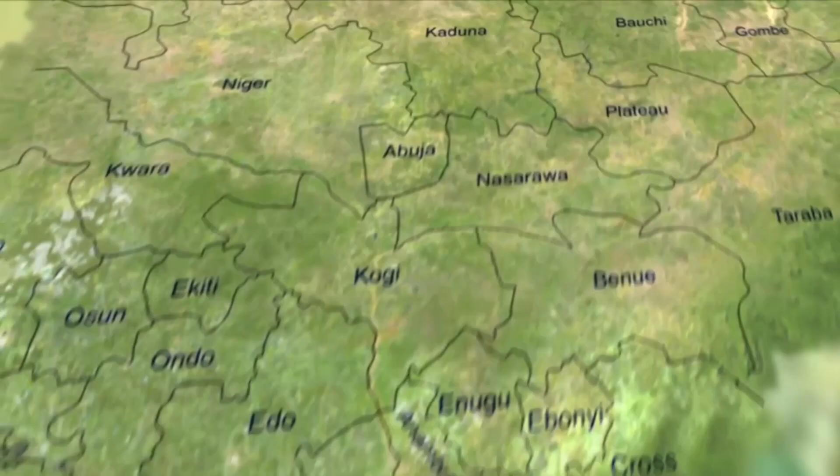The importance of the water resources sector in human life cannot be overemphasized, as it remains dynamic. The strategic position of the sector in Nigeria's socio-economic development has made the Buhari administration place high priority in executing projects in the sector under the Federal Ministry of Water Resources, with the appointment of the Honorable Minister of Water Resources, Engineer Suleiman Hussaini Adamu, in year 2015.

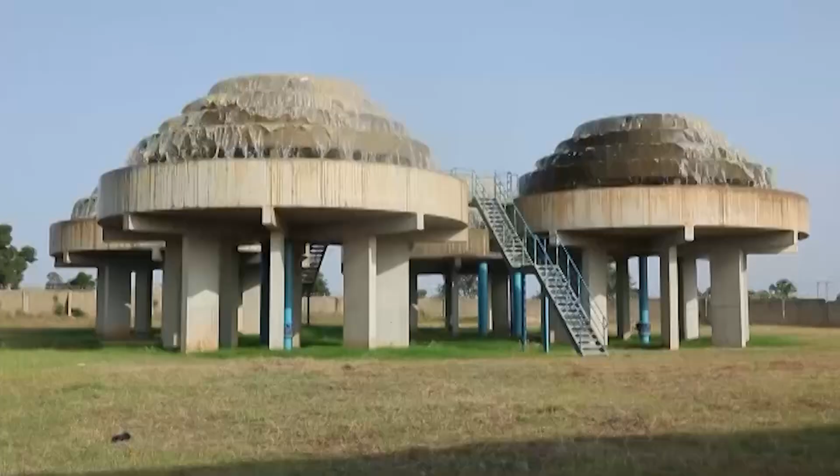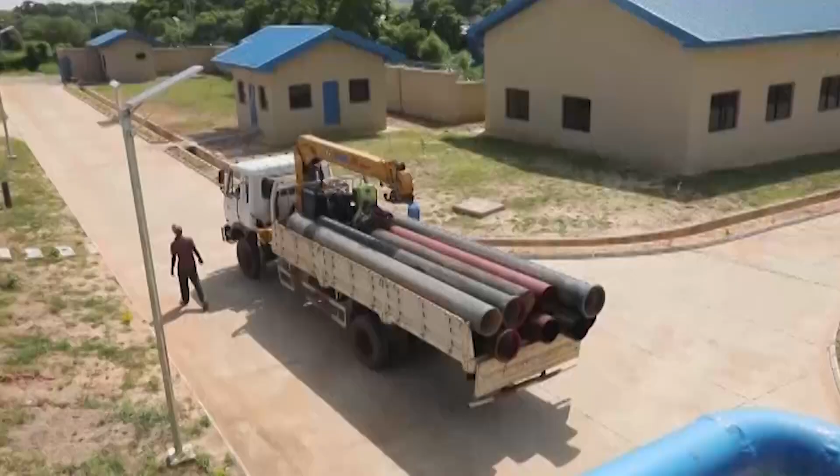As a round peg in a round hole, he went about reinvigorating and revitalizing the sector to enable it to deliver extensively on its mandate and refocus the ministry towards ensuring that the country meets not only its developmental requirements but the United Nations Sustainable Development Goals by the year 2030. A water resources roadmap was instituted by the Honorable Minister to guide the process of revitalizing the ministry. A major component of the reform process is the repositioning, professionalization, and revitalizing of the river basin authorities.

The Upper Benue River Basin Development Authority is one of the 12 river basins established under Decree No. 25 of 1976 and amended by Decree No. 35 of 1987, with a catchment area of approximately 257,606 km². The authority's operational area covers 9 senatorial districts comprising Adamawa Central and Southern Senatorial Districts, Bauchi South Senatorial District, the whole of Gombe and Taraba states in northeastern Nigeria.

The vision of the Upper Benue River Basin Development Authority is the provision of water for multi-purpose uses within its area of jurisdiction and a mission of strategic objectives for exploration, exploitation, conservation of water in a sustainable manner within the context of the National Water Resources Master Plan, brilliantly initiated by the Honorable Minister of Water Resources, Engineer Suleiman Adamu.

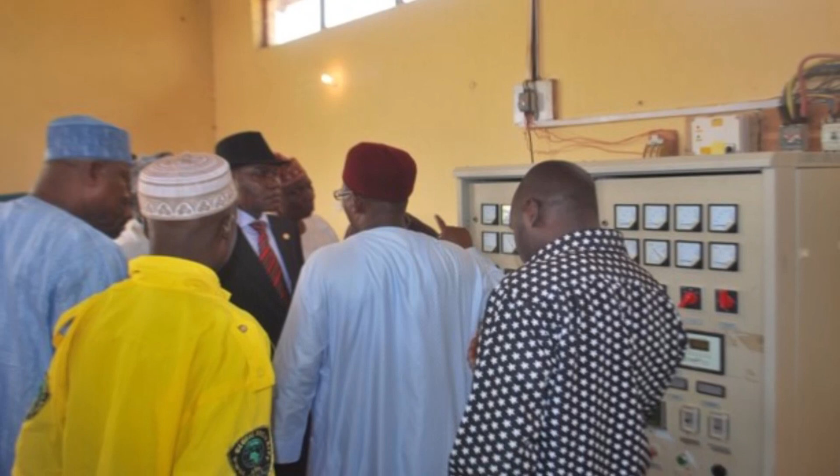The authority has well-trained personnel at the headquarters, area offices, and project sites, with national and international reputation, who have been involved in project conceptualization, studies, and design and implementation of World Bank TRIMING irrigation, UNIDO ICSHP, USAID sponsored studies, and design of hydropower projects, NEWMAP, bathymetric survey of Benue River, and the National Water Resources Master Plan.

The Managing Director of Upper Benue River Basin Development Authority is Engineer A.H. Moazu, Fellow, Nigerian Society of Engineers, Fellow, Nigerian Institution of Civil Engineers. A seasoned engineer, hydrologist, and consummate administrator. He speaks further on the significant milestones of his agency.

Upon coming into office, I gave priority to revitalizing our mandate projects that were existing since the establishment of the organization in January 1976, when the organization was established specifically for harnessing and development of water resources infrastructure, especially irrigated agriculture, for sustenance of the teeming populations of the country.

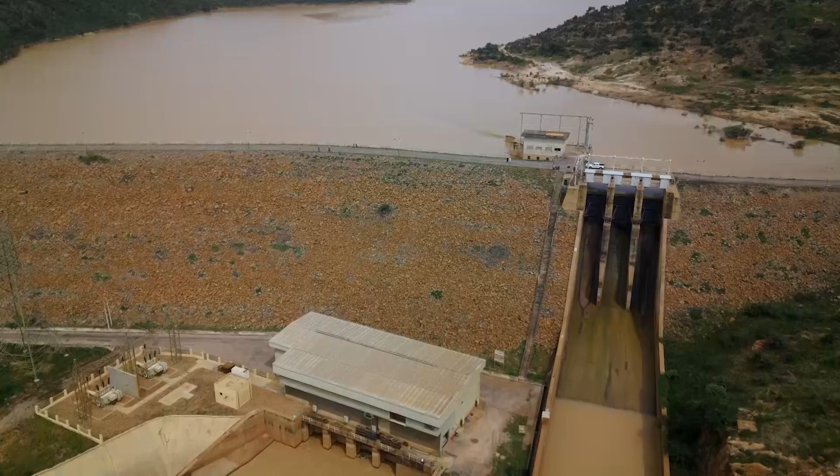Among the numerous accomplishments of the Upper Benue River Basin Development Authority is the completion and maintenance of the Dadinkowa Multipurpose Dam and Irrigation Project located in Gombe State. About the third largest dam in Nigeria, the Dadinkowa Dam has about 2.8 billion cubic meters storage capacity of water. It is designed to irrigate 44,000 hectares gross, to generate 40 megawatts of electricity, approximately 259 GWh per year, to produce 20,000 tons of fish annually, to provide raw water to Gombe regional water supply,

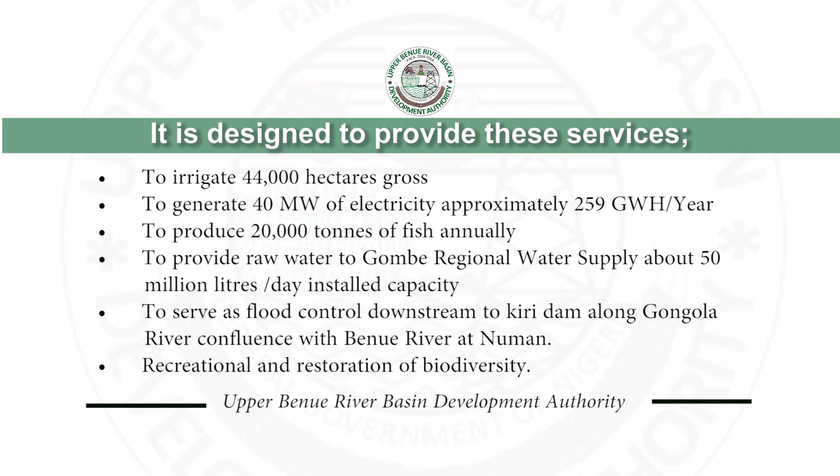about 50 million liters per day installed capacity, to serve as flood control downstream to Kiri Dam along Gongola River confluence with Benue River at Numan, recreational and restoration of biodiversity.

Other milestones in the project include the powerhouse for the 40 megawatt hydroelectric power completed in 2020, generating power into the national grid, ready for commissioning. 2,000 hectares of land for irrigation by gravity under construction by the World Bank TRIMING Project. 40 hectares pilot irrigation scheme established with 2 solar-powered irrigation pumps at Garin Rafi on the minor irrigation upstream of the reservoir. About 10,050 farming families gainfully employed under minor irrigation schemes. Over 470 tons of grains equivalent produced annually.

4,118 hectares are being cultivated under minor irrigation scheme at Dadinkowa Dam drawdown area, with about 28,826 tons of grains equivalent produced annually. Through partnership with RIFAN, CBN and Anchor Borrowers scheme, 200 hectares being cultivated under rain-fed.

This Dadinkowa Dam was conceived, constructed and commissioned by the 15th of June 1988 by the then President General Ibrahim Badamasi Babangida. The dam has a multi-purpose use of irrigation, water supply to Gombe and environs, hydropower generation.

The features of this dam: it is one of the largest dams in terms of volume, third largest now in terms of volume. The gross volume of this dam is 2.8 billion cubic meters of water at a normal level of 247 meters above sea level. And then the live storage, that is the usable amount of water you can use on this reservoir, is 1.77 billion cubic meters of water, which is the one that electricity, irrigation and water supply can tap from.

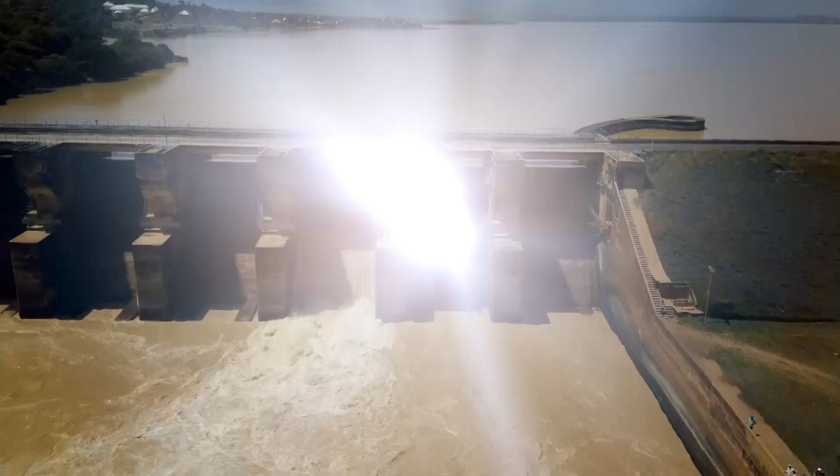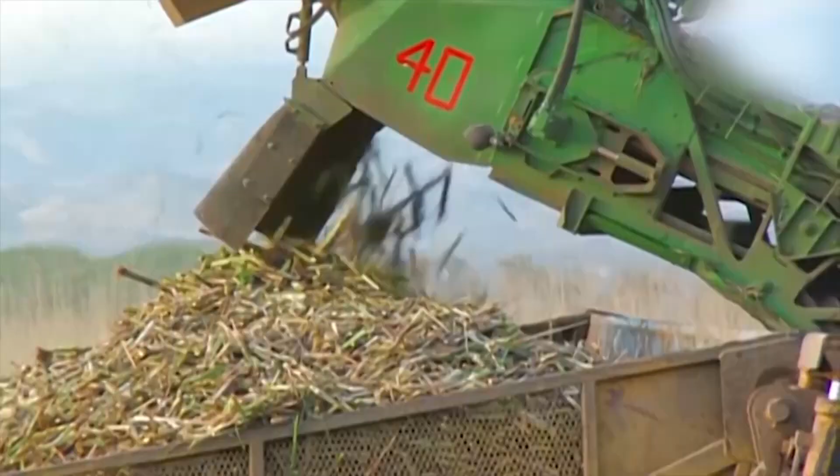Another milestone achievement is the Kiri Dam and irrigation, Adamawa State. Dam constructed in 1982 for irrigation of 12,000 hectares, Savannah Sugar Company, now Dangote Sugar Company. Achievements: dam completed in 1982, 615 million metric ton storage capacity. Main canal, 13.5 kilometers length constructed.

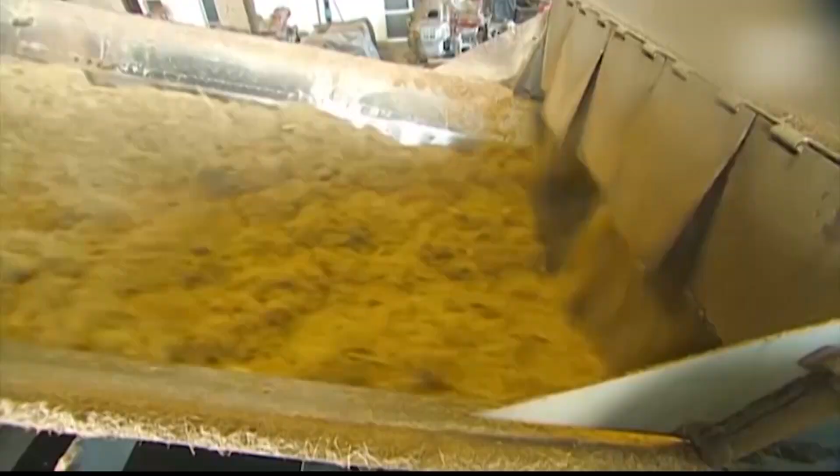6.0 kilometers length canal lined. 7.5 kilometers length unlined canal maintained annually. 16,000 hectares Savannah sugar plantation provided with irrigation water. About 150,000 tons of sugarcane produced annually. Over 120,000 jobs created. Fishing development enhanced. About 12,000 tons of fish harvested by local fishermen annually. Adamawa State in partnership with American firm to produce 25 megawatt electricity at planning stage.

Kiri Dam has a capacity of about 615 million cubic meters of water. We have water all year round for irrigation purpose, and the design inflow of the dam is designed to take in water worth 4,250 cubic meters per second and a design outflow of 4,000 cubic meters per second. Now we try to regulate the water within the normal top water level at 170.5 meters to the lowest drawdown at 167.5 meters of water at the reservoir.

We need the Kiri Dam, and it's very useful to our plantation. And as a matter of fact, we use on our peak period, that is the peak of dry season, nearly 23 to 24 million cubic meters per month. Of course in the rainy season we just reduce it because we have the rain, but it is very important.

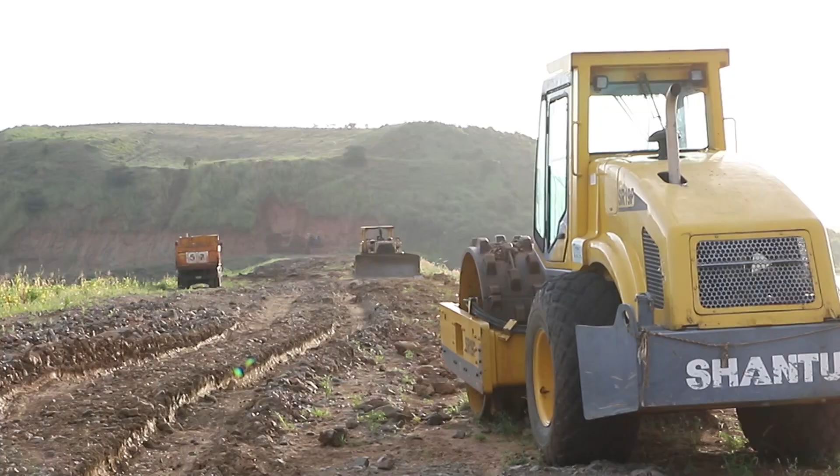The Cham Dam Project, Gombe State. Among the numerous achievements of the Upper Benue River Basin Development Authority is construction of the Cham Dam and irrigation project in Balanga local government area of Gombe State. The work involves reconstruction of the dam embankment and irrigation scheme development. It also includes the construction of the spillway and access road. The spillway is completed while work on the dam is 90% completed. Reservoir already impounded.

Achievements: it serves as water detention for flood control. Development of irrigation scheme for the surrounding communities in progress. We have about 5.6 million cubic meters of water that is lying in the reservoir that is potentially to be used for irrigation downstream of the dam. Presently, the works are still ongoing with about 78.9% completion on the embankment and other components of the dam. The spillway is 100% completed, and if you go to that side, you can see that the spillway is working effectively.

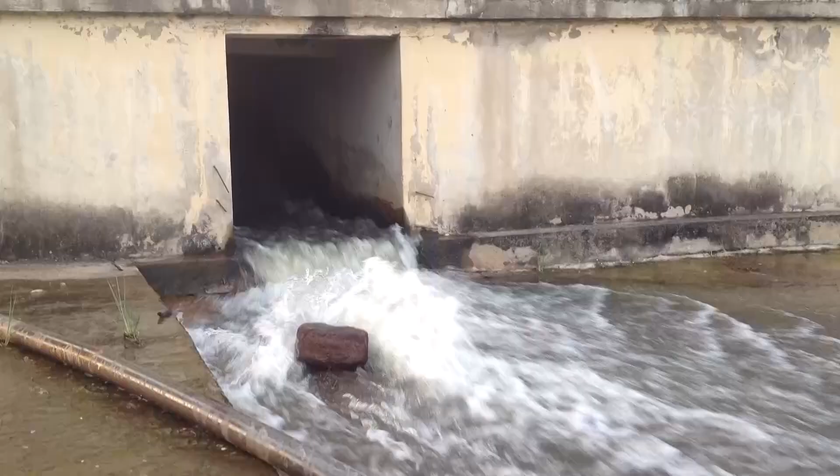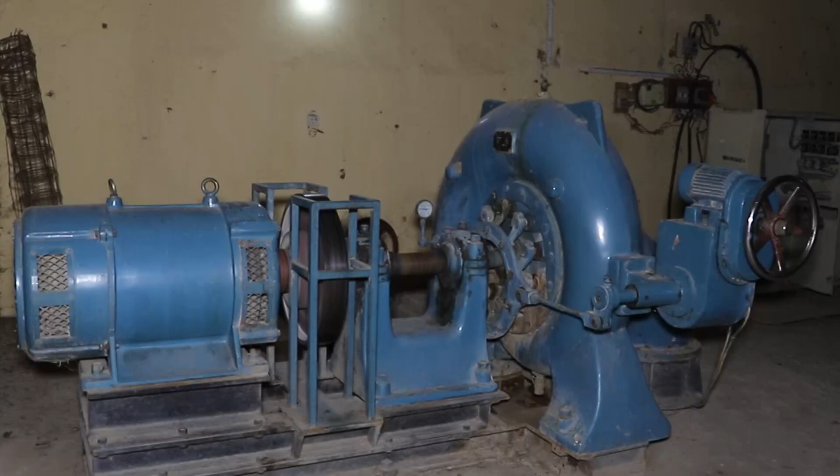Gubi Dam Hydropower and Irrigation Project, Bauchi State. The dam is an earth-filled dam located about 25 kilometers from Bauchi town in Bauchi State. It has a total storage capacity of over 30 million cubic meters. The aim of the project is to encourage the development and provision of small hydropower projects to meet the energy requirements of rural communities who do not have access to power supply from the national grid.

This is expected to stimulate economic activities and improve the standard of living of the communities. In addition, it is used for irrigation, fisheries development as well as augmentation of water supply to Bauchi metropolis. Achievements: dam completed, 37 million cubic meter storage capacity, small hydropower component, 150 kilowatts installed in collaboration with UNIDO, with 7 communities benefiting: Kimni, Giliri, Rumde, and Makira.

45 hectares pilot irrigation scheme developed. 309 tons of grains equivalent produced annually. 151 farming families gainfully employed. About 675 jobs created.

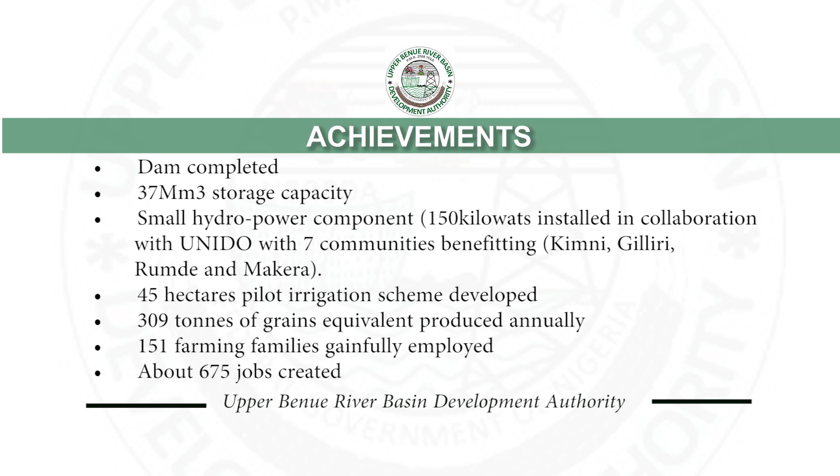Yola Irrigation, Lake Geriyo Project, Adamawa State. This was designed to irrigate 1,200 hectares at Lake Geriyo near Jimeta metropolis. Achievements: 286 hectares fully under irrigation, 233 hectares being cultivated under rainfed. Over 924 tons of grains equivalent produced annually. Over 496 farming families gainfully employed.

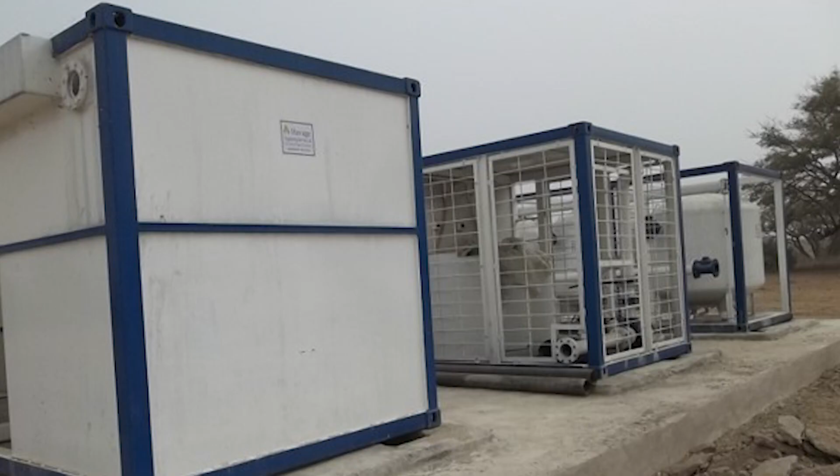About 1,980 jobs created. Kaltungo Earth Dam, Gombe State. The dam was constructed for water supply and flood control. Achievements: 21 million cubic meter storage capacity, dam completed in 2015. Water supply component under construction.

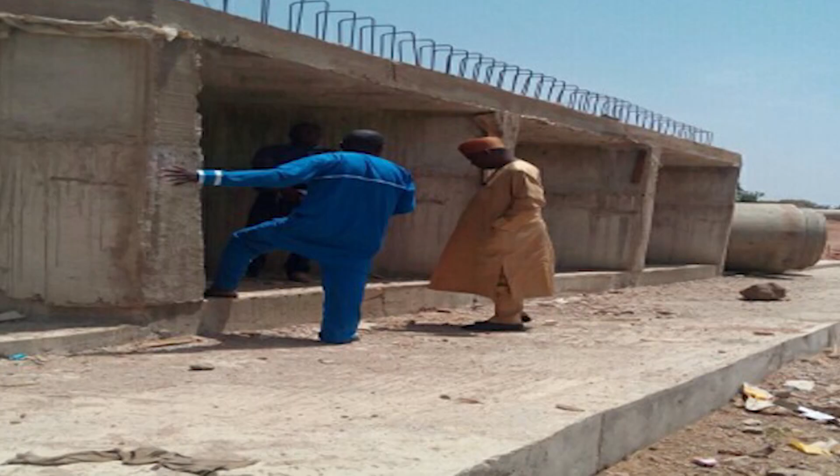Lower Taraba Irrigation, Taraba State. Designed to irrigate 38,000 hectares around Gassol and Mutum Biyu in Taraba State, by construction of a barrage at Tella and 35-kilometer length conveyance canal. Achievements: 9-kilometer length of protection bund constructed. Over 3,000 hectares developed under rain-fed cultivation by the communities.

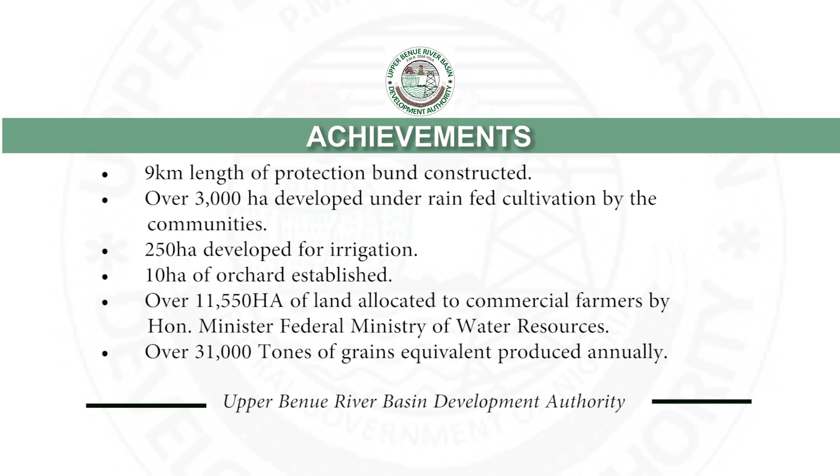250 hectares developed for irrigation. 10 hectares of orchard established. Over 11,550 hectares of land allocated to commercial farmers by the Honorable Federal Minister of Water Resources. Over 31,000 tons of grains equivalent produced annually.

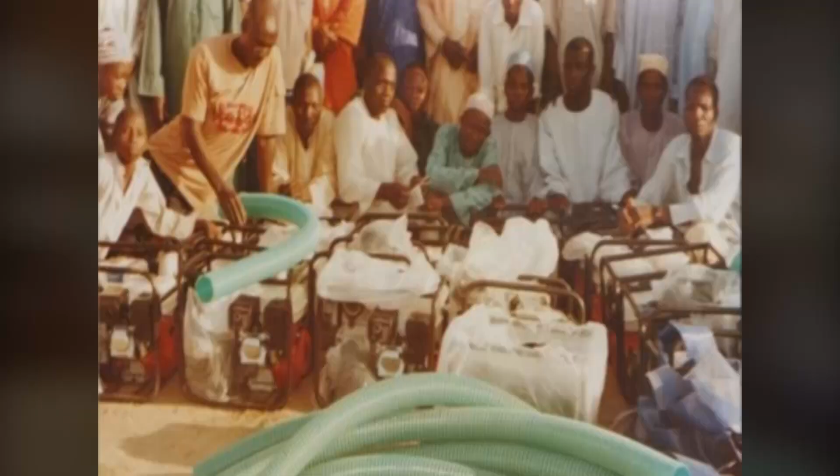Establishment of Songhai Model Farm. The authority established Songhai Model Farm at Tallum, Adamawa, Ruwan Sanyi, Gombe, Waya, Bauchi, and Gassol, Taraba States. The scheme is designed to increase food security, animal husbandry, fisheries, and empowerment of graduate youth within the authority's area of jurisdiction. Achievements: Tallum, Adamawa State, 40 hectares of land developed for solar-powered irrigation.

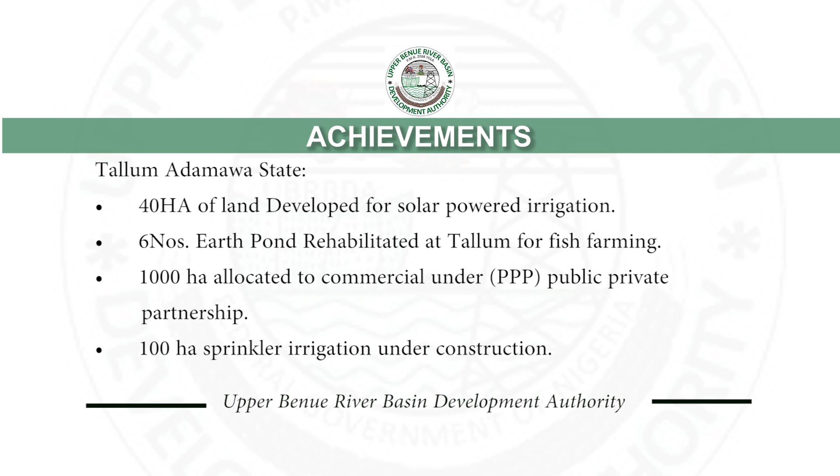6 numbers fish ponds rehabilitated at Tallum for fish farming. 1,000 hectares allocated to commercial farmers under public-private partnership PPP arrangement. 100 hectare sprinkler irrigation under construction. Waya, Bauchi State. 5 hectares orchard developed. 10 numbers fish ponds constructed. Ruwan Sanyi, Gombe State. 6 hectares orchard developed.

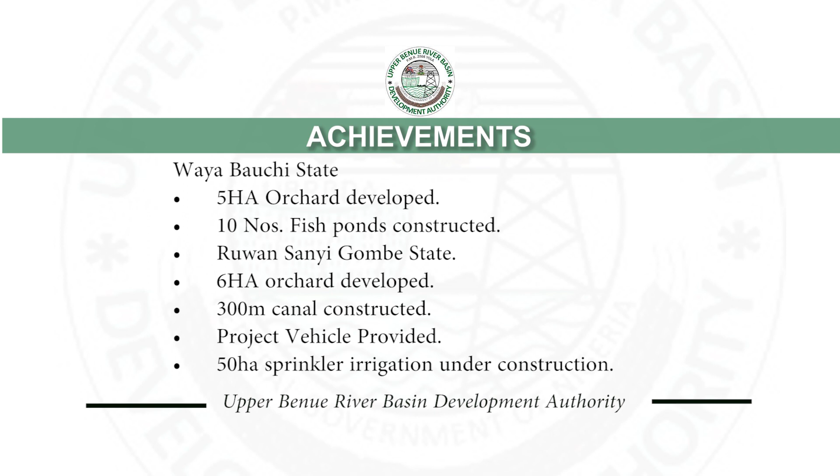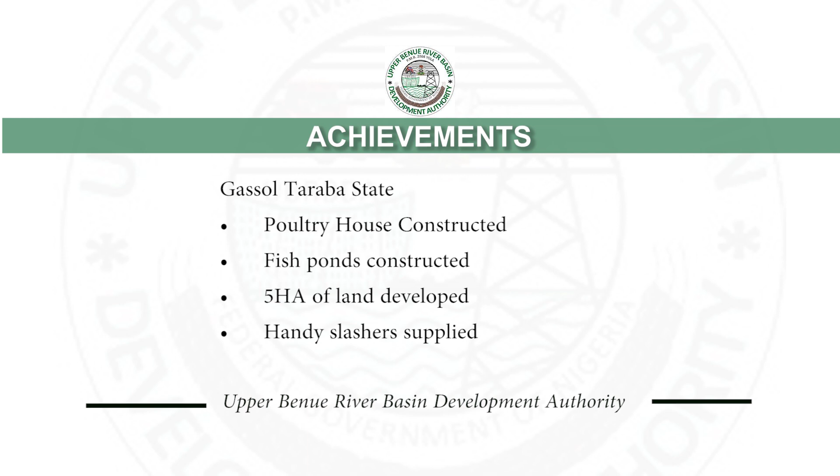300-meter canal constructed. Project vehicle provided. 50 hectare sprinkler irrigation under construction. Gassol, Taraba State. Poultry house constructed. Fish ponds constructed. 5 hectares of land developed. Hand slashers supplied. It is worthy of note that the Upper Benue River Basin Development Authority embarked on construction of

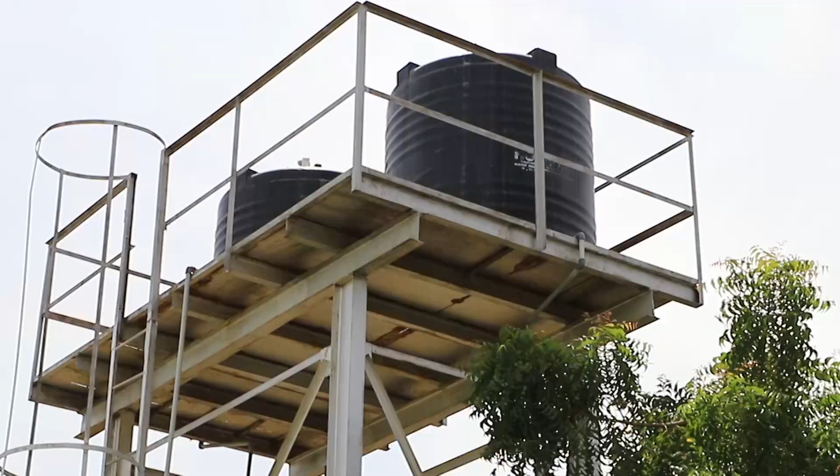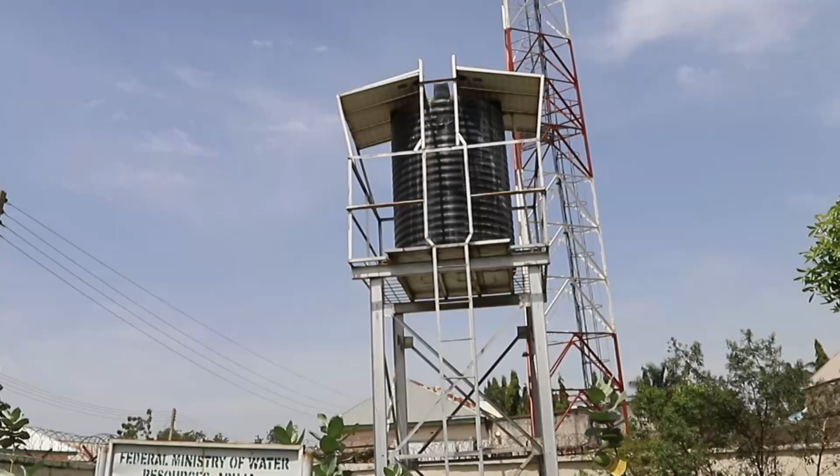water supply schemes within its catchment areas. Significant water supply schemes for semi-urban areas and villages were completed at various locations within the operational area as follows. Adamawa State, from 2016 to 2021, number of solar-powered and motorized boreholes, 184, beneficiaries, 92,000. Hand pump boreholes, 1,141, with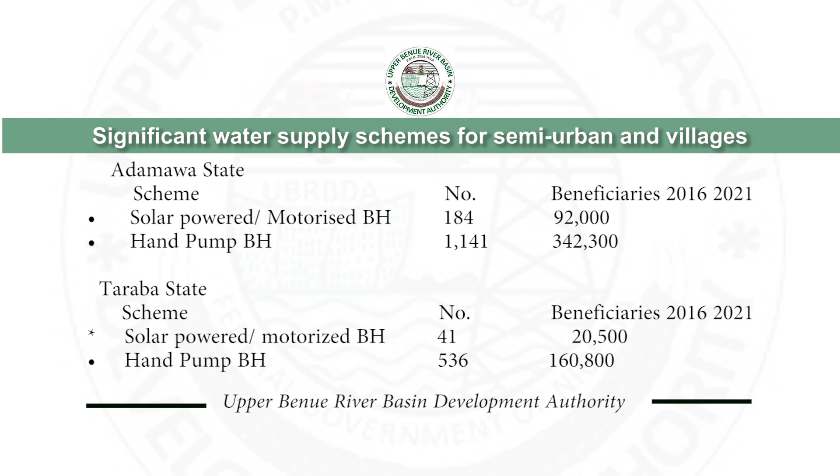342,300 beneficiaries. Taraba State, from 2016 to 2021, solar-powered and motorized boreholes, 41, with 20,500 beneficiaries. Hand pump boreholes, 536, with 160,800 beneficiaries. Gombe State, from 2016 to 2021, semi-urban schemes, 5, with 50,000 beneficiaries. Solar-powered and motorized boreholes, 220, with 110,000 beneficiaries. Hand pump boreholes, 271, with 81,300 beneficiaries.

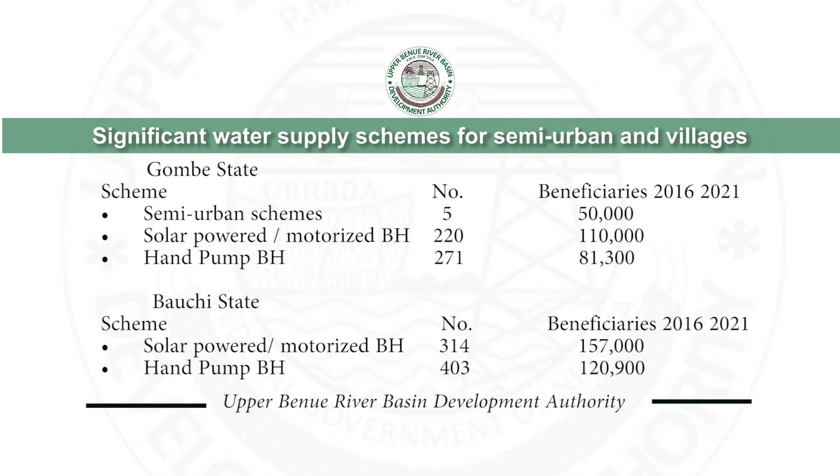Bauchi State, 2016 to 2021, solar-powered and motorized boreholes, 314, with 157,000 beneficiaries. Hand pump boreholes, 403, with 120,900 beneficiaries. In summary, total semi-urban, 5, with 50,000 beneficiaries. Total solar and motorized boreholes, 759, with 379,500 beneficiaries. Total hand pump boreholes,

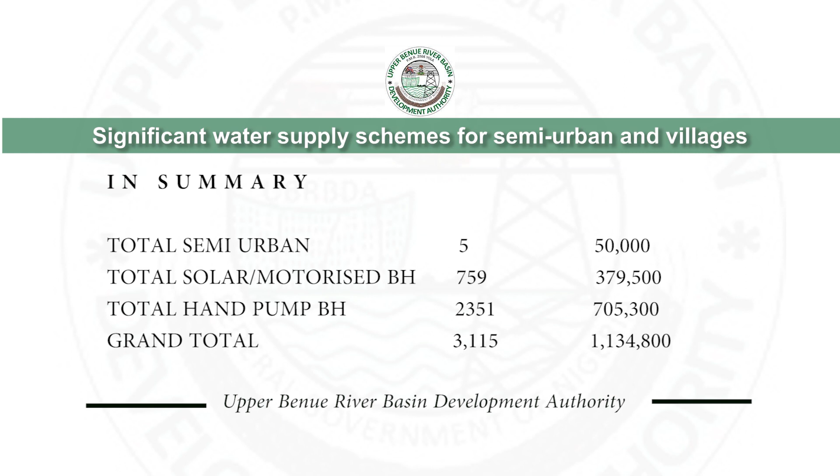2,351, with 705,300 beneficiaries. Grand total, 3,115 projects, with 1,134,800 beneficiaries. Rural and semi-urban water supply schemes.

Since establishment of the organization, we have drilling machines and a team that goes to places where we have projects to provide these services as part of corporate social responsibility. But presently, the federal government is providing money through members of the National Assembly, federal constituency and senatorial projects, for drilling of solar-powered boreholes and hand pump boreholes at various locations.

Apart from our own intervention through our own capital appropriation, underground water development, we also drill boreholes to communities within the catchment areas where we have projects.

Ongoing construction projects by the Upper Benue River Basin Development Authority. The authority has a number of ongoing construction works as follows. Reconstruction of Cham Dam and irrigation. Construction has reached 80% completion. Dugwaba Dam. Construction has reached 35% completion. Mararraban Donga Dam. Construction has reached 30% completion. Belel Dam and water supply, construction has reached 25% completion.

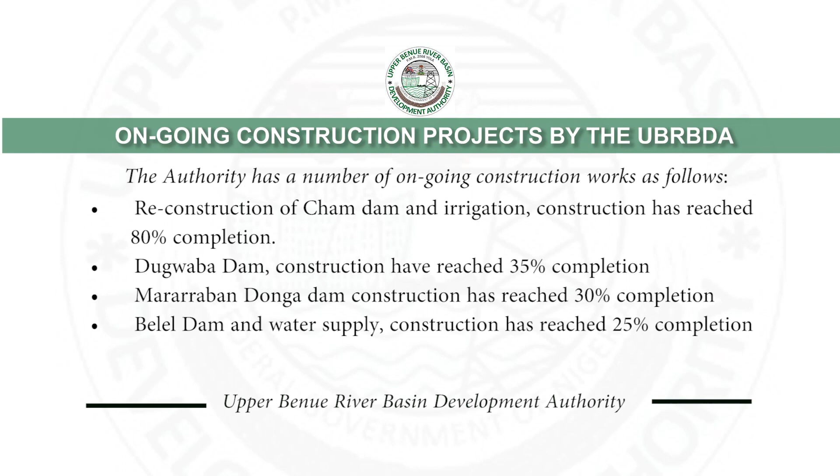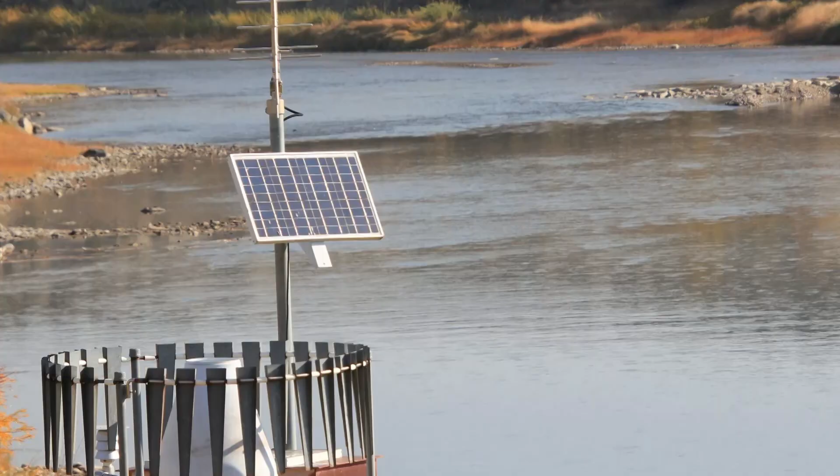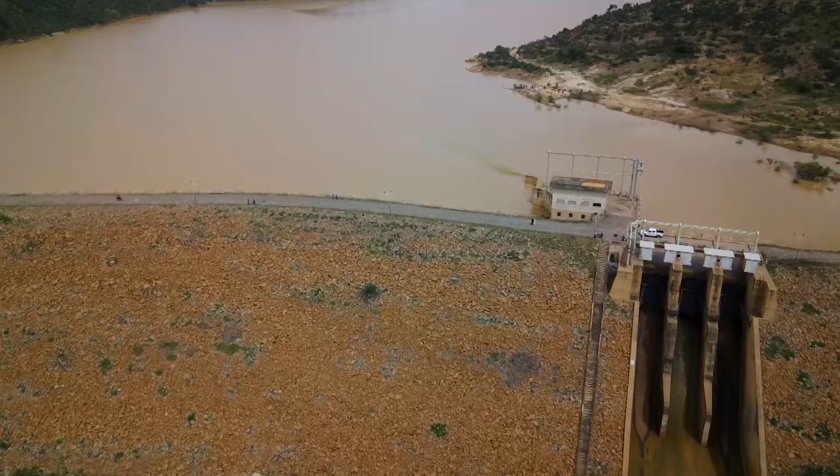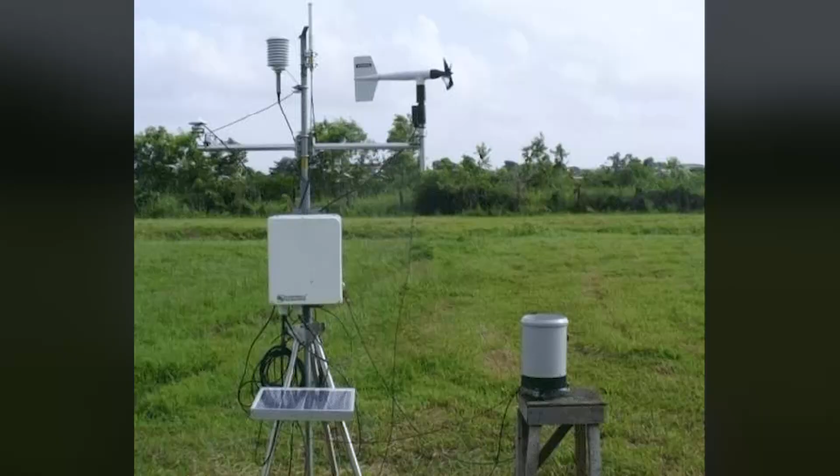Hydrometeorological activities. From inception in 1976, the Upper Benue River Basin Development Authority has about 68 water gauging stations for collection, computation and analysis of hydromet data, which is published in the form of yearbooks and digital data. This has helped in monitoring and maintaining water levels through the stations along the River Benue and its tributaries, to aid discharge and cross-sectional measurement on the River Benue and its tributaries.

The authority has 2 automatic weather stations donated in 2017 by the Adamawa State University, installed at Yola and Kiri Dam to enhance collaboration and research on data for the planning processes. The authority also procured and installed a Davis Vantage automatic weather station at Dadinkowa Dam in 2019.

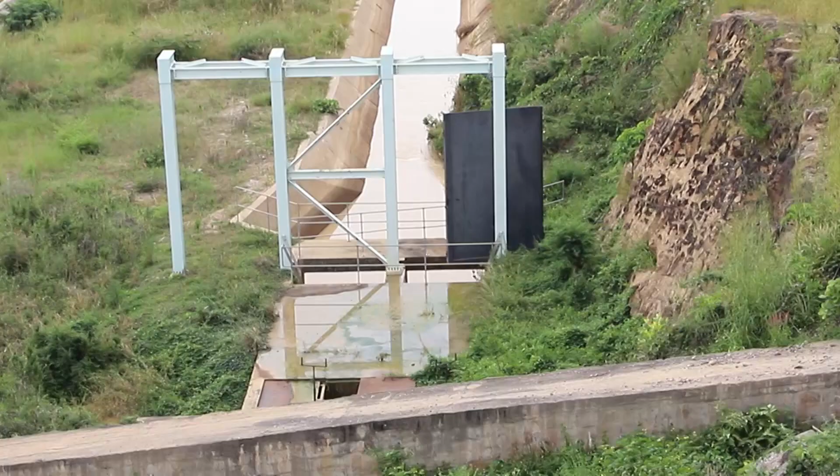Additional 3 numbers were procured and installed at Gembu, Gassol, and Bauchi in 2019. Furthermore, an acoustic Doppler current profiler (ADCP) automated discharge measuring equipment as well as fiber board were procured by the authority for the hydrology units.

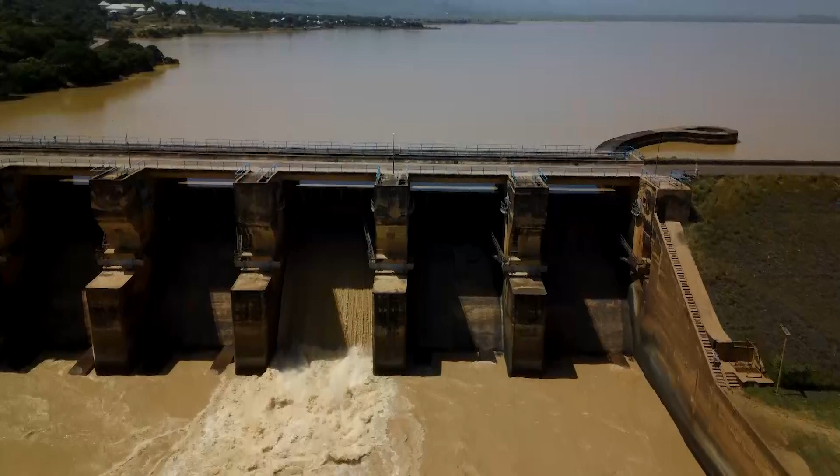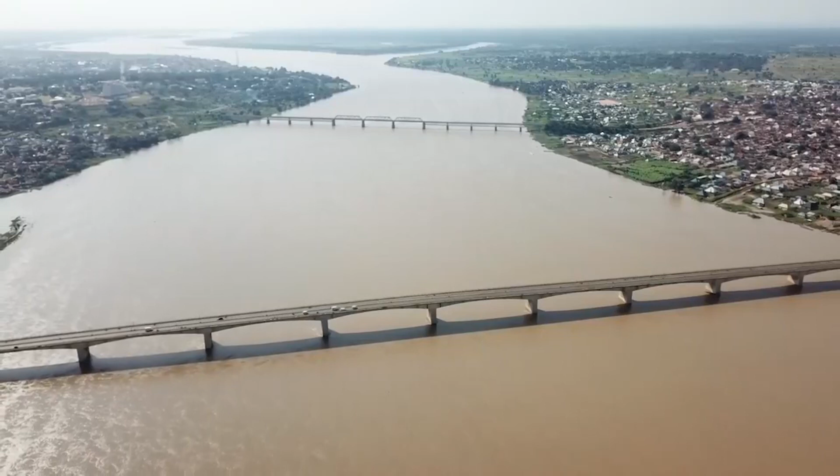The basin has extensive potentials for future development, and these include: apart from Benue River, which is one of the 2 major rivers in the country, the authority's operational area is drained by 8 rivers, namely Mayo Ine, Mayo Belwa, Kilange, Taraba, Donga, and Suntai on the southern bank, and Pai and Gongola on the northern bank.

Feasibility studies carried out revealed that within the operational area of this authority, water resources potential exists to the tune of 55.5 billion cubic meters. To harness these potentials, a dam is required at each of the following locations: Dasin Hausa, Mayo Ine, Kilange, Dindima, Bagel, Gembu, Suntai, and Barrage at Tela.

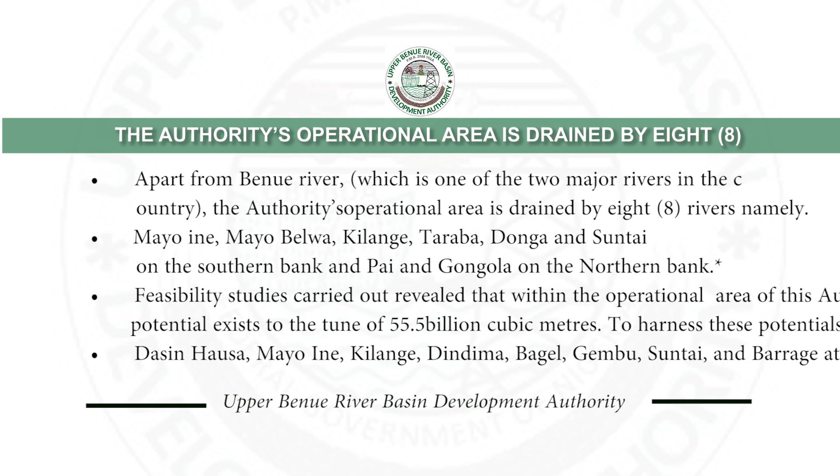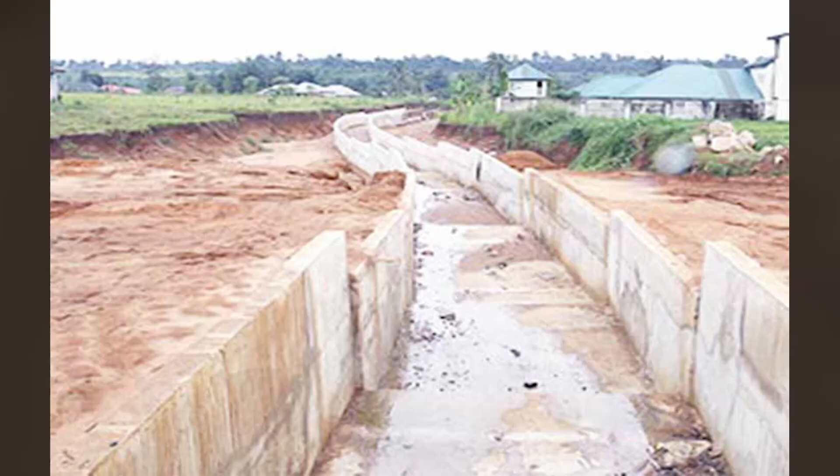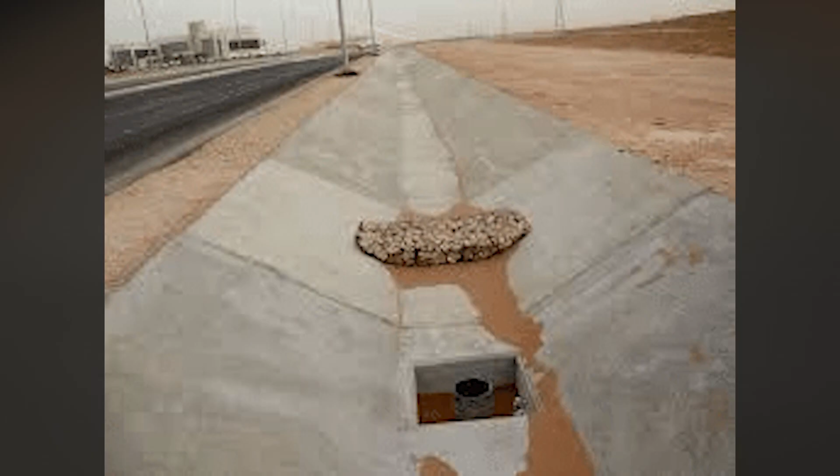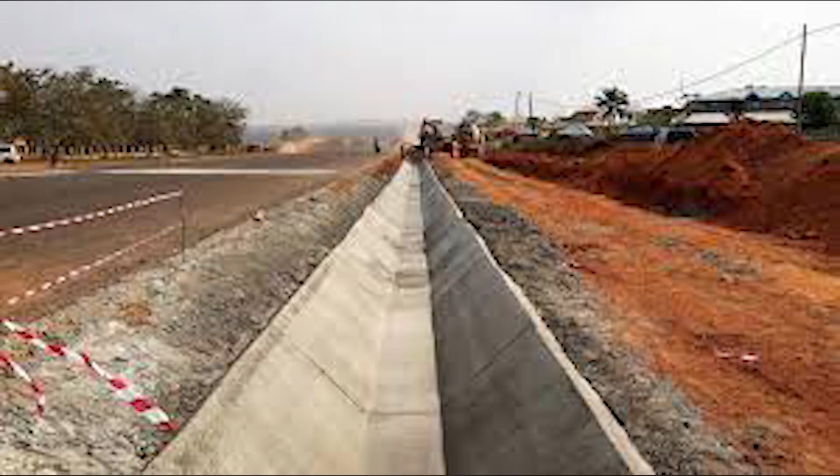Erosion and flood control projects. In the area of flood control and erosion, the Upper Benue River Basin Development Authority has recorded the following milestones. Gombe State, about 4.5 km reinforced concrete lined drainage channel at Tudunwada Shamiki Ward, Gombe, 2019 to 2022. 2.5 km Jankai Bubayero Primary School, Dawaki Ward, Gombe State capital, 2020 to 2022. 5 km Duku Erosion and Flood Control Projects, 2018 to 2019, Duku Town.

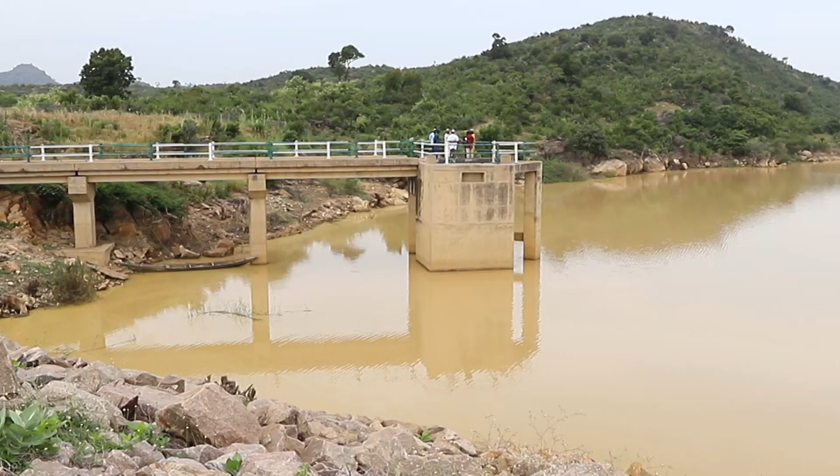Small earth dams at Gobia, Bogoro, Tafawa Balewa local government area of Bauchi State, 2016 to 2021, approximately 30 million cubic meters. Ledde Zange Small Earth Dam, Duku local government area for domestic and livestock development, 10 million cubic meters, 2018 to 2021. Rehabilitation of 5 existing small earth dams at Bauchi and Gombe states for minor irrigation and livestock, 2019 to 2021.

In almost all the state capitals, in Yola here this year we have 1 erosion control project to be constructed, and Gombe is just like another Anambra state in the north because it's located on a sandy unconsolidated formation with so many streams and gullies that were developed as a result of deforestation and desertification. So in the 80s there were a lot of erosion and flood control projects that were funded by Ecological Fund, but now the authority is funding 2 erosion and flood control projects in Gombe town, and we have done 1 in Duku local government headquarters.

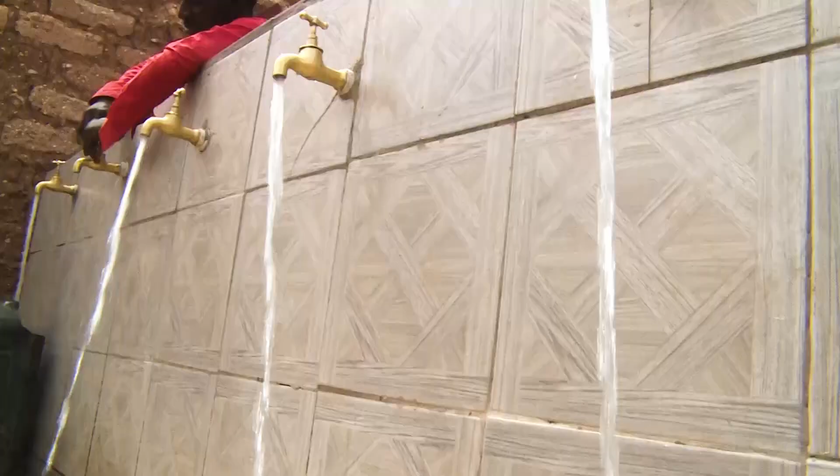PWASH, the Partnership for Expanded Water Supply, Sanitation and Hygiene, is a national collaboration for the improvement of access to water supply and sanitation in Nigeria through a structured multi-sector partnership. PWASH is designed to build on previous efforts and complement existing water supply and sanitation strategies by instituting a coordination and prioritization framework for project delivery.

The Upper Benue River Basin Development Authority was able to achieve a lot by establishing a PWASH desk in 2019 and constructed 15 PWASH model toilets with attached boreholes across the 9 senatorial districts: 4 in Adamawa, 3 in Bauchi, 5 in Gombe, and 3 in Taraba states. All these projects were executed according to PWASH standard.

We really appreciate the Upper Benue River Basin Development Authority for building this toilet and water here in Ngombono Primary School. Definitely, before then, we didn't have a source of water like this. In fact, I must express my gratitude to them for building it, because we have more than 4,000 people in this school. Before then, our people were suffering for water and the toilet. But because of that, we really appreciate and express our gratitude to the Upper Benue Basin.

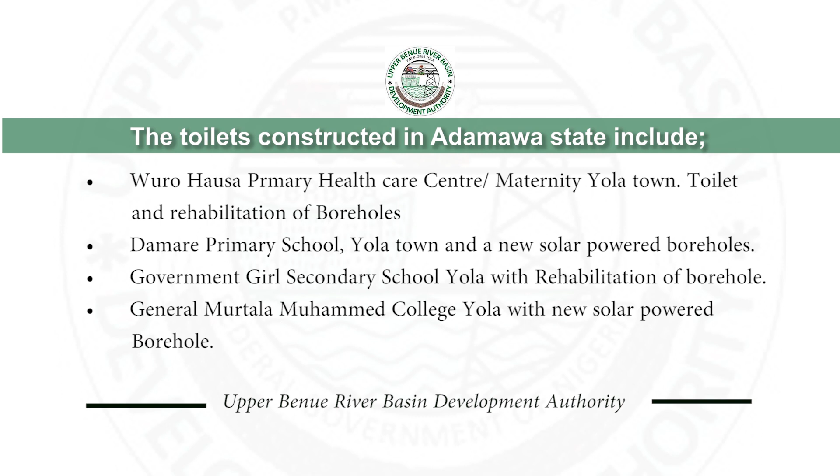The toilets constructed in Adamawa State include Wuro Hausa Primary Health Care Center and Maternity, Yola Town, toilet and rehabilitation of boreholes; Damare Primary School, Yola Town, and a new solar-powered borehole; Government Girls Secondary School, Yola, with rehabilitation of borehole; General Murtala Muhammed College, Yola, with new solar-powered borehole. Bauchi State: Government Girls Secondary School, Bauchi, with new solar-powered borehole; Government Secondary School, Anguwan Borno, Bauchi, with new solar-powered borehole; Government Secondary School, Sale Manga, Bauchi, with new solar-powered borehole,

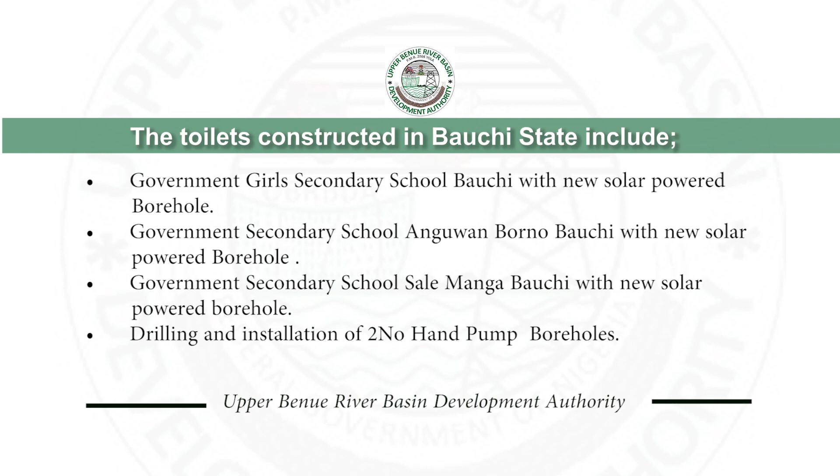drilling and installation of 2 hand pump boreholes. Gombe State: Government Science Secondary School, Gombe, with rehabilitation of borehole; Tudunwada Primary School, Gombe, with rehabilitation of borehole; Zainab Bukachua Health Center, Gombe, with new solar-powered borehole; Primary Health Center, Kagarawal, Gombe, with new solar-powered borehole; Vocational Training Center, Gombe, with new solar-powered borehole. Taraba State: Muhammad Inya Primary School, Jalingo, with new solar-powered borehole; Turaki A Maternity, Jalingo, with new solar-powered borehole; Government Day Secondary School, Gabadu, Jalingo, with new solar-powered borehole.

I want to appreciate the Upper Benue programs that they came and sited a water project in our facility. This water project they've sited here, we are having water from where they dig. The water in this place is helping the facility. In fact, it's the only water that doesn't stop. It's helping the facility all the time if there is solar, if there is sunshine.

The PWASH model toilets constructed by the authority within its catchment of 9 senatorial districts are 15 with attached boreholes powered by solar system. Indeed, the Upper Benue River Basin Development Authority has provided an enabling environment for the creation of jobs for thousands of people in many communities in its catchment area, in line with the targets of the Buhari administration. It is the main hub of economic activity in the area. There is no doubt that with sustained encouragement, the Upper Benue River Basin Development Authority will continue to transform the socio-economic development of the area.